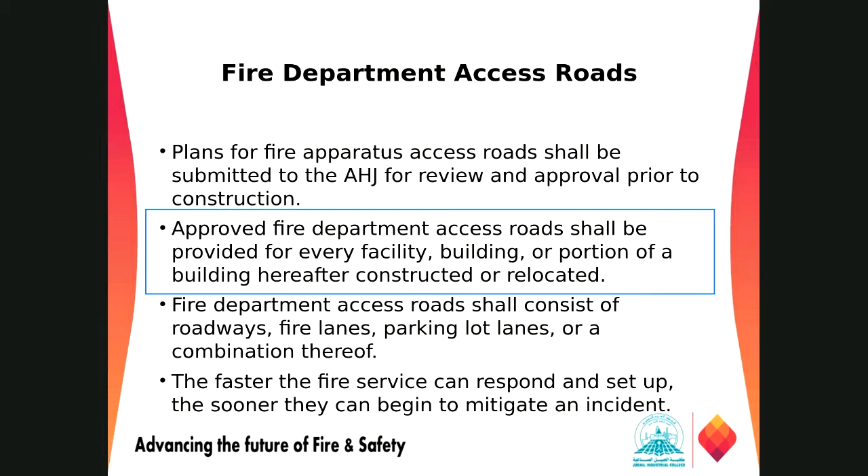NFPA 1, which is the fire code, says that as per 18.2.3.2.1, the fire department access road shall extend to within 50 feet or 15 meters of at least one exterior door that can be opened from the outside and provide access to the interior of the building.

So if this is our building, and this is our road getting in at this location, the distance between this road and the fire department connection, or the exit of the building, should be maximum within 50 feet, not more than that, as per NFPA 1.

The next clause is that when we have one or two family dwellings or townhouses where we have installed an approved sprinkler system as per NFPA 13R or 13D, in those areas we can increase the length between the road to the nearest exit to 46 meters or 150 feet, because the building is protected with the sprinkler system, so a higher maximum gap is allowed as per NFPA 1.

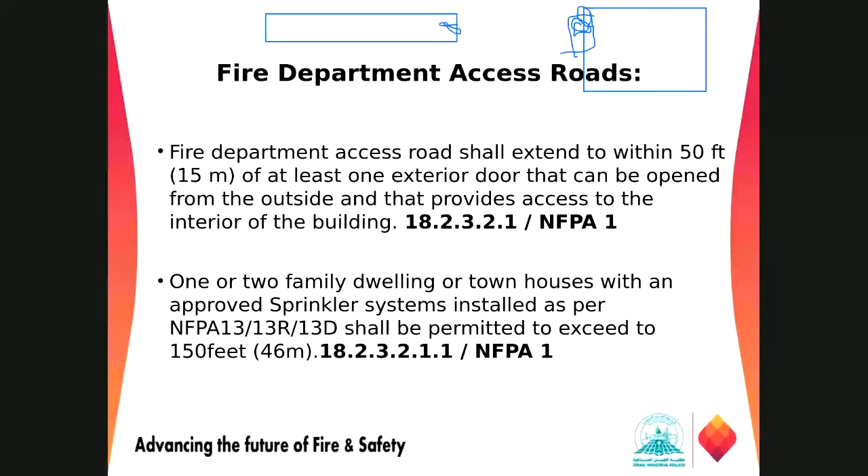Now we are talking about the vertical clearance and horizontal clearance. The width of the road shall be 6.1 meters for the fire department access, and the minimum vertical clearance from the road should be at least 4.1 meters, so that it can go easily without any obstruction from bridges and underground roads. So 4.1 meter is the vertical clearance, and 6.1 meter is the horizontal clearance, the width of the road.

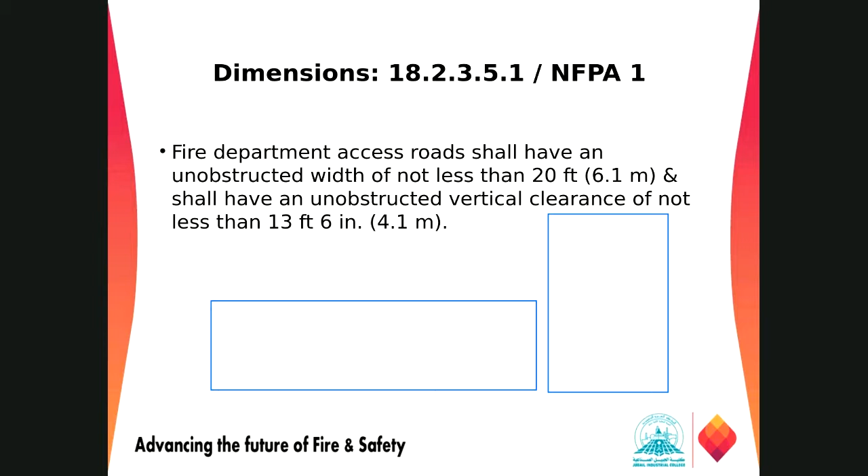As we said, the dimension of the road should be minimum 6.1 meter. While we are calculating the dimension of the road, Mr. Rafi asks about this size for any combined compound or houses which require fire department trucks under civil defense jurisdiction. Okay, so minimum 6.1 meter is needed for every housing and all, so the fire truck can go inside the building.

But now you talk about houses and compounds - what about malls, for example, or schools? Is it different? This road in the malls and in the houses, it is the same. Suppose there is a mall, let's say in Dammam, the road which is going to the mall should be a lane of minimum 6.1 meter width up to the mall, or to any building, which should be clear and protected for the fire department trucks - should be 6.1 meter.

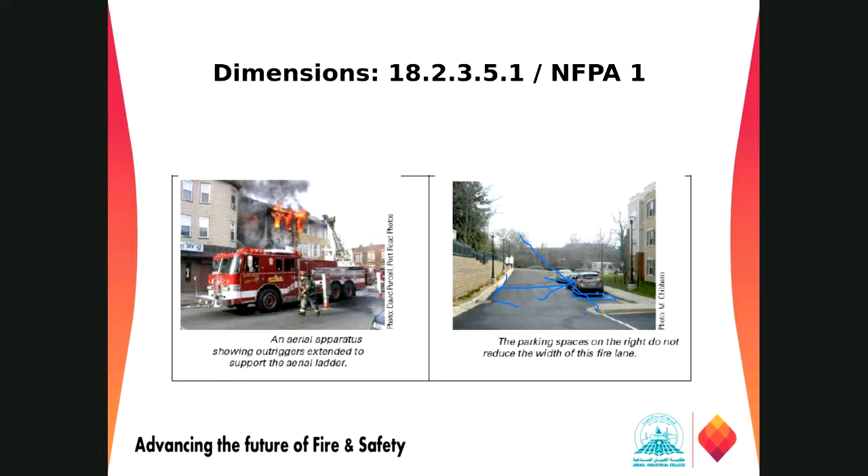And we have the turning radius as per 18.2353 of NFPA 1. When a fire department goes at the last in and how they will turn their vehicles, the minimum turning radius for the most restrictive fire apparatus should be considered. The trucks, how much space they need to turn, what should be the requirement for the turn around?

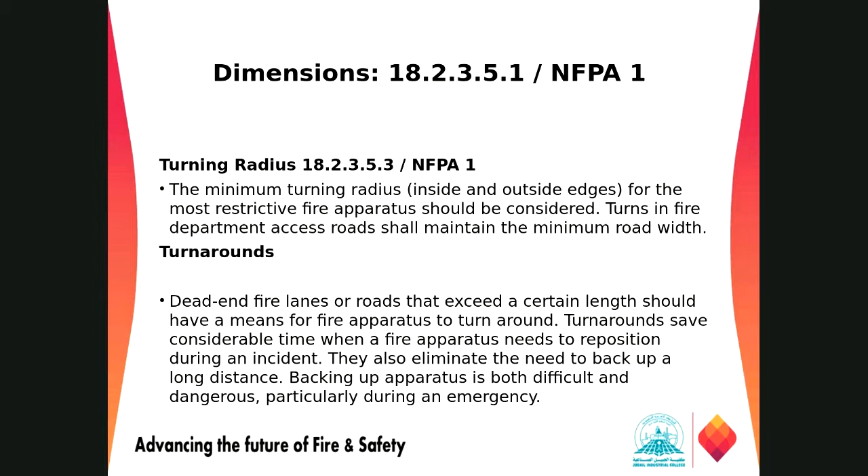So a dead end fire department access road in excess of 150 feet, or 46 meters in length, shall be provided with approved provision for fire apparatus to turn around. The dead end means after that road ends, they have to take it back. Suppose this is the main road, and the fire truck is coming to fight the fire in this area. They are talking about this distance.

If this distance is more than 46 meters in length, we have to provide the turning requirement based on that. So what should be the minimum length? As per NFPA 1, the minimum length equals the length of the longest fire apparatus. The bigger the trucks, based on that you have to consider the turning radius. This road is 6 meters wide, but the turning radius should be based on the maximum length of the trucks, or the fire department vehicles, which they need to turn around in case of fire.

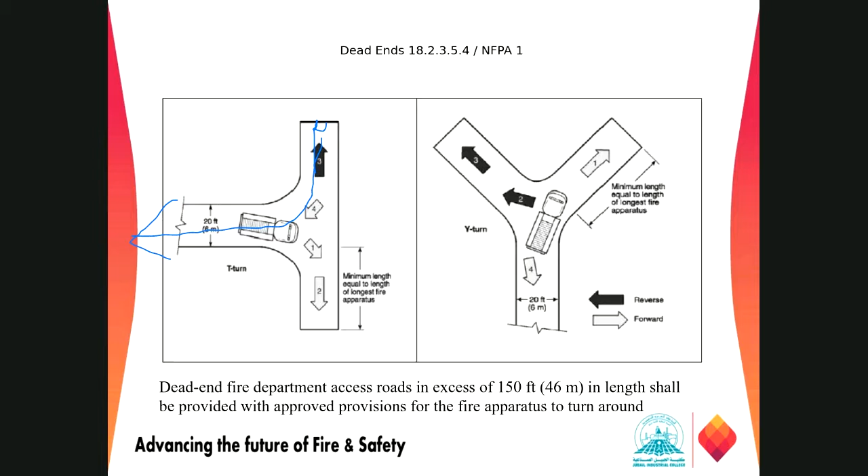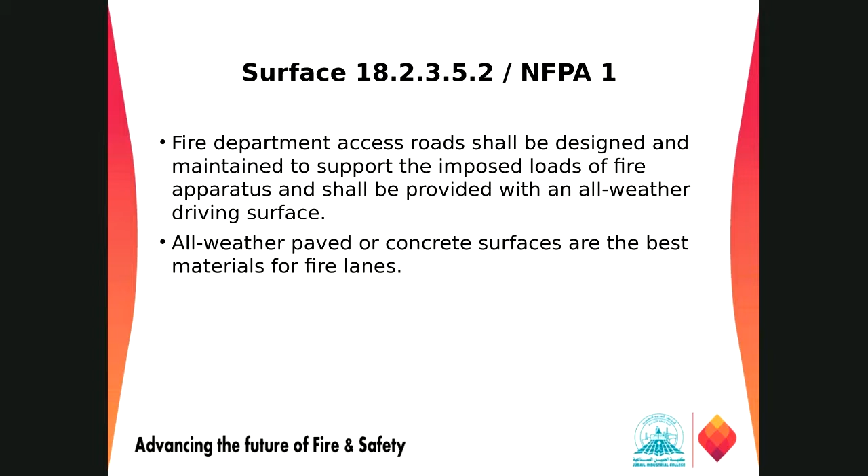And then we have the requirement for the surface - the road's finishing and the surface for the fire department trucks. What should be the load? Those fire apparatus shall be provided with an all weather driving surface, and the requirement you can see for 18.2352 from the NFPA 1 code.

The load - how much load one fire truck can withstand - this should also be considered while planning the fire department access roads.

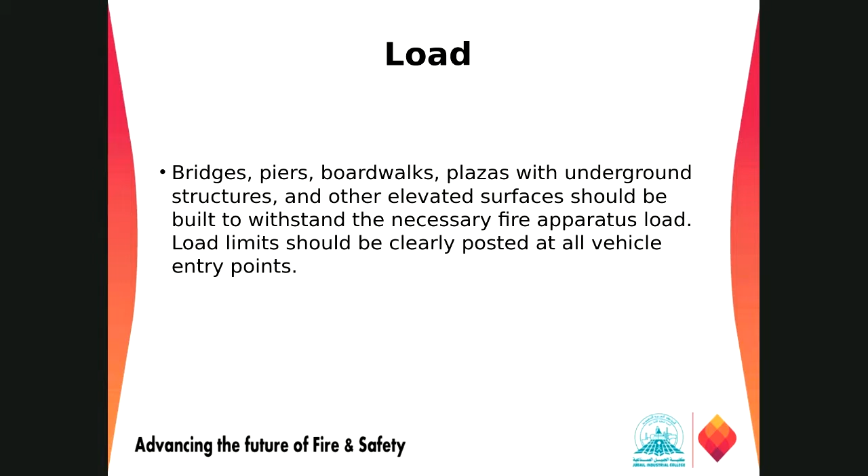This is all about the fire department access road, module three. Now we have some checklist, which I will include in the slide.